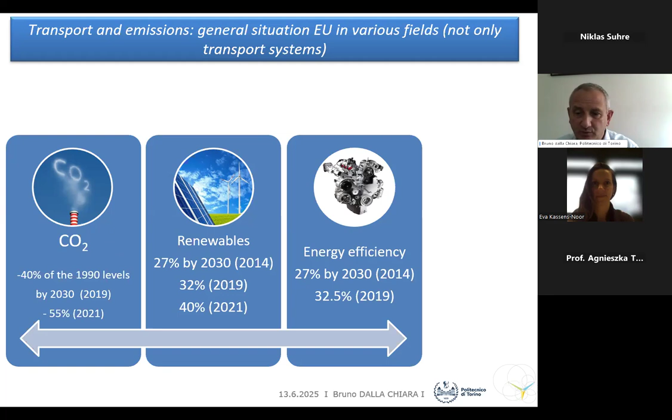First point is the European Union has stated already some years ago, but over the years has modified the vision. The first time was in 2014: a reduction in CO2, an increase in renewables, an increase in energy efficiency. And this doesn't concern only the transport domain and mobility, but every field. Within the transport domain and mobility, we can push in particular the reduction in CO2 through modal shift, railways, metros, people movers, ropeways, through technologies, powertrains, intelligent transport systems, and through applied maths, that means optimization.

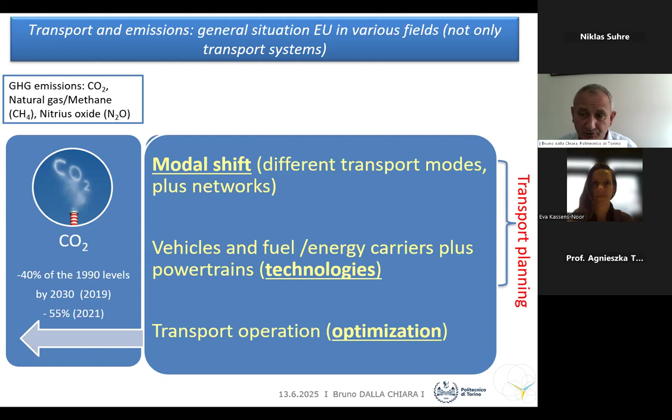I already told you this last time, but I'm resuming because I will use this concept today. And the first two in particular concern transport planning. I also remember that greenhouse gas emissions are not only given by CO2, but also by natural gas or methane and by nitrous oxide. If you release natural gas in the atmosphere, it contributes to greenhouse gas emissions much more than CO2. And then I will also remember this last one, then I will start with the new concepts.

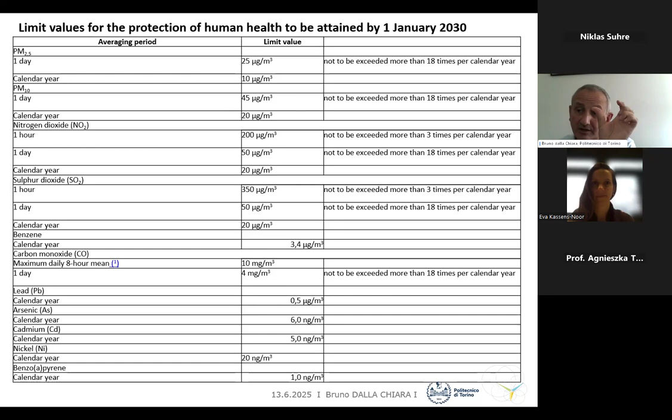That is, last year, 2024, the Directive 2881 was published by the European Parliament and the Council, and it concerns the level of concentration of pollutants mainly in our cities, where a great part of the mobility and population take place or live in Europe. So, resuming, we have this goal of reducing CO2, increasing efficiency, increasing renewables. We have also the goal to contain emission of CO2, which is a global problem. At European level, we have this goal of containing local emissions, and in particular looking at their concentration, especially in the cities. And this table is accompanying the Directive 2881 of last year, which will be in full operation from 2030, and which regards the concentration of pollutants, mainly, as I said before, in our cities.

If we consider that this is a source that cannot last for decades, or if it will be more expensive, or if we have to attack the North Pole or Greenland to obtain crude oil beside deep oceans, or if we consider that pollution coming from crude oil is relevant, one or more of these elements, then we have to look at alternatives.

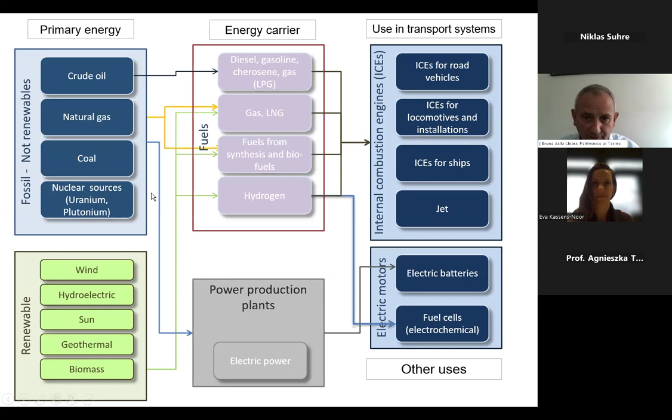So the first point is that once we decide to abandon the monopoly of crude oil, what we have to see is if the energy source that we have in mind is available in nature on its own, or if we have to prepare the fuel. In this kind of analysis, if we think, for example, of a battery, we need to analyze the well to wheel. This concept was already introduced last time. That means from the well to the tank and from the tank to the wheel.

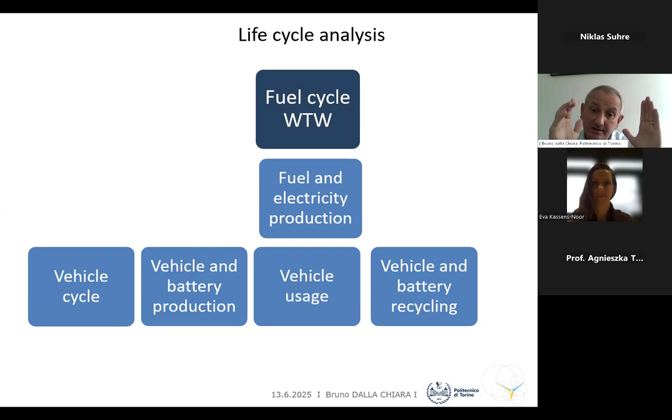But we don't only have to analyze the energy chain of the fuel or the energy carrier, but the life cycle of the vehicle. Because if we have to emit a lot of CO2 for building a motor vehicle, then the CO2 will be emitted in the life cycle, though not necessarily during the operation. For example, an electric vehicle could seem to avoid CO2 emissions at the tailpipe because it has no tailpipe, but in the life cycle approach, we have to consider that for creating that vehicle and that battery, the CO2 has been emitted before.

Okay, given this general premise, I recall that as regards CO2, in 2011 the European Union introduced for the first time the concept of containing the CO2 emissions of car makers within their fleet, passing from a threshold of 130 grams of CO2 per kilometer to 95 grams of CO2 per kilometer in 2020, actually 2021. Then in February 2023, the European Parliament said, well, let's bring this 95 grams of CO2 per kilometer to zero. And this has opened a wide discussion. We will see this later.

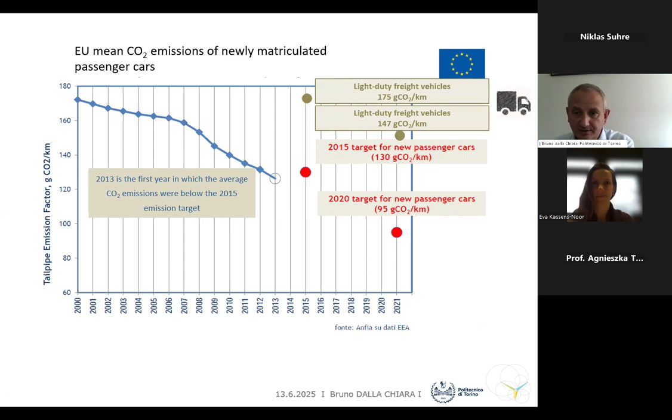As regards light duty freight vehicles, this threshold passed from 175 grams of CO2 per kilometer in 2015 to 147 grams of CO2 per kilometer in 2021, actually end of 2020. Okay, which are the regulations which started this evolution? These two: this is the legislative vision, regulation 510 of 2011 and regulation 397 of 2013. Sorry, some parts are in Italian, but you have the text in English too. This regards both motor vehicles and light commercial vehicles. It was the first time.

Before that date, there were just Euro 1, 2, 3, 4, 5, 6 as emission classes, but looking just at the local emissions. Okay? Local emissions, pollutants, and global emissions, CO2 in particular. In 2011 and 2013, the European Union started analyzing these values, with an environmental relevance that was becoming important in these years.

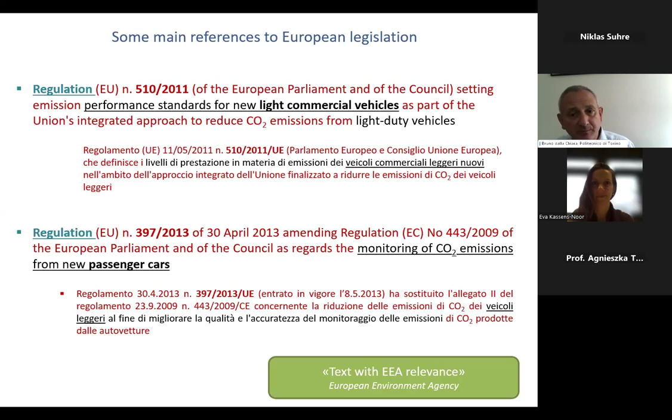Okay, skip this slide. As regards internal combustion engines, sorry, this slide is in Italian because I had prepared it that way, but I'll comment on it rapidly. In 1992, when there was a first feeling about the environmental impact, and so the concept of sustainability of transport systems, a sustainable mobility in terms of emissions, the first class of engine was introduced, and it was Euro 1.

Then in 1997 it became Euro 2, then in 2001 Euro 3, in 2006 Euro 4, in 2008 Euro 5. Then Euro 5 had two steps, Euro 5A and Euro 5B. Euro 5B introduced filters for particulate matter, greatly reducing the particulate matter produced by internal combustion engines. And then Euro 6, the current one, was introduced in September 2014 with different versions.

Euro 6B, 6C, D temp, and D. Then from the 1st of July this year, the Euro 7 will enter into force, Euro 7. It was prepared, it was, let's say, emitted for the first time in November 2023, but the application of it starts this year.

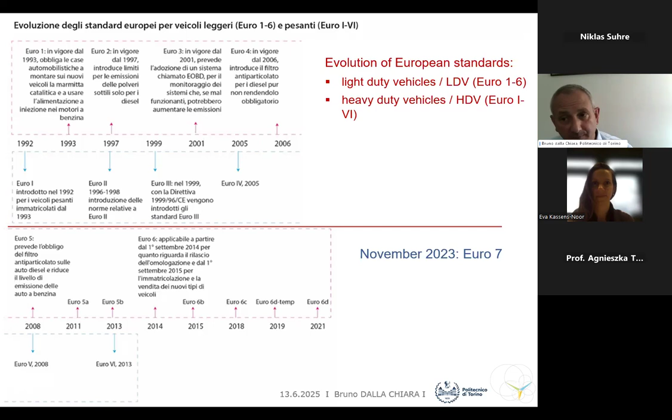Okay, so at a certain moment of the history of this classification, as I was saying before, in 2011, also CO2 was introduced as an important element to be considered, but not at each vehicle, but in the fleet of each car maker. We will see it later.

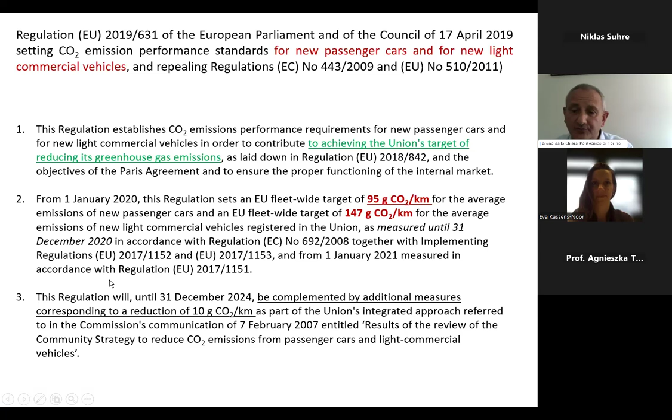Okay, then in 2019, the regulation 631 introduced a certain number of specifications confirming the value of 95 grams of CO2 per kilometer that was stated some years before, but also introducing some reduction in the emissions that the European Union wanted and still wants from the car makers in order to obtain in the next years a containment of, in particular, the CO2 generated by the fleet of each car maker.

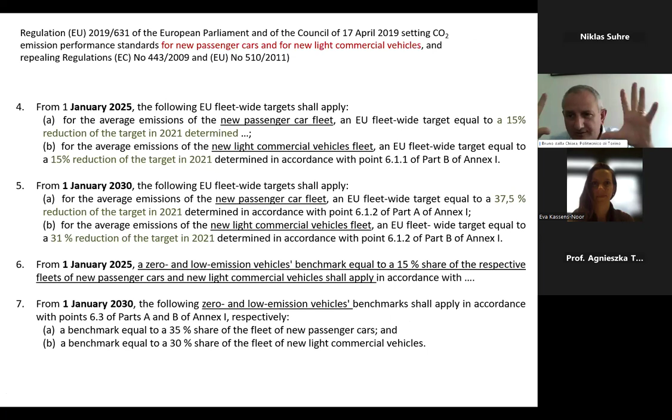I don't enter into the details. For me, it's important that you understand this evolution, and then we will see how we can pursue it. What about the effects of this? Well, if the car maker is able to reduce the average value of its fleet underneath the threshold, in this case 95 grams of CO2 per kilometer, then it will receive super credits. But nearly none, no car makers are able to do this.

Then if they have values that are higher, they have to pay a penalty. And this year, the car makers have asked to suspend the penalty because they are not able to satisfy all the very, let's say, important, relevant, but also difficult to apply goals that European Parliament has stated.

So we are in this moment at a great ideal of containing both local pollutants and global emissions of CO2, and a great difficulty of the car makers to apply them further than 95 grams of CO2 per kilometer. And we are at this point. This year, the European Parliament allowed them to spread the satisfaction of the limit of 95 grams of CO2 per kilometer, with the consequent penalties, over 3 years. But it's not a solution, it's just a way of, well, let's think about it.

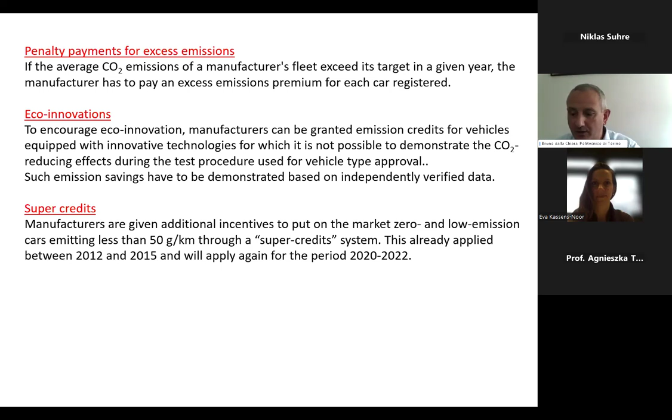Okay, then, as I said before, this Euro 7 classification of engines started 3 years ago, but with application from this year, and it was approved by the Parliament in April 2024. Consider that there are some difficulties, because a car maker cannot at the same time go towards zero emissions and Euro 7, because there is a time for using the plant installations, I mean, a certain number of years. It's not true that we can invest in a certain line and then after a few years change it, because you would have, let's say, some difficulties also from the economical point of view.

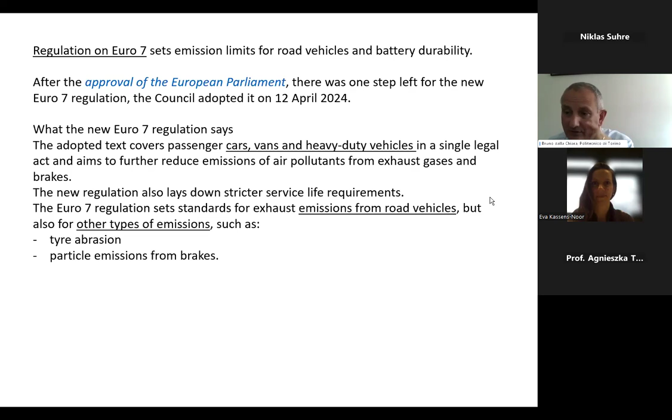Okay, what is the innovation of Euro 7? Well, it doesn't consider just the emissions from the internal combustion engine, but also from tires, tire abrasion, and from brakes. These are the three main sources: brakes, tires, and engines. So, of course, these concern any kind of vehicle, also the electric one, in particular the tire abrasion. Then, as regards buses and heavy trucks, I don't enter into detail about them because it is not part of this lesson today. But anyway, they have been introduced recently with some different, let's say, viewpoint concerning them.

In any way, what is now considered with Euro 7 is the introduction of the concept of life cycle. And this is important because, as we understood also from last time, it's not only important the local level emission from the tailpipe, but as I said before, the well-to-wheel and the life cycle of the vehicle itself. We need to recall that the white paper published already in 2011 stated that the challenge in Europe is to break the transport system dependence on oil, but without sacrificing its efficiency and without compromising mobility. So we have to think, when thinking about alternatives to oil-derived fuels, of engines, motors that neither sacrifice efficiency nor compromise mobility.

Is the European Union the only one that 2 years ago stated this zero emission goal? Yes, because other parts of the world, as you can see in this slide, United States, China, Korea, and so on, declared some reductions, important reductions, but none of them said ban, ICE ban, internal combustion engine ban. And this is under discussion now.

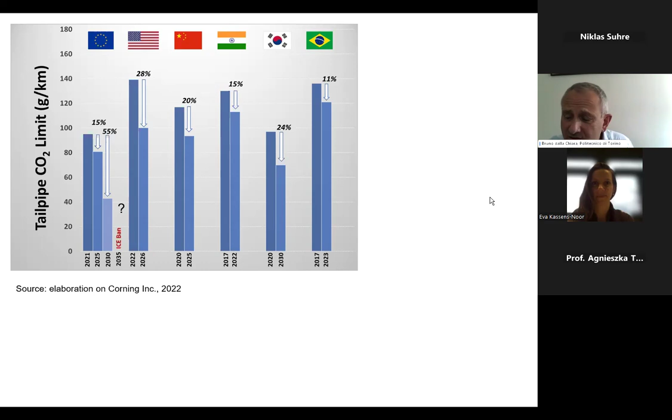It's an important matter because we know that the European Union relies a lot of its competitiveness on the production of motor vehicles, notwithstanding the fact that we are pursuing a hierarchical, differentiated, flexible, multimodal approach to mobility, because we can use the train from city to city, we can use the car, we can use the bike, we can use different modes. Notwithstanding that, we have an industry, so we have to take care about the effects of, let's say, making this industry close in case it cannot pursue the goals that have been stated.

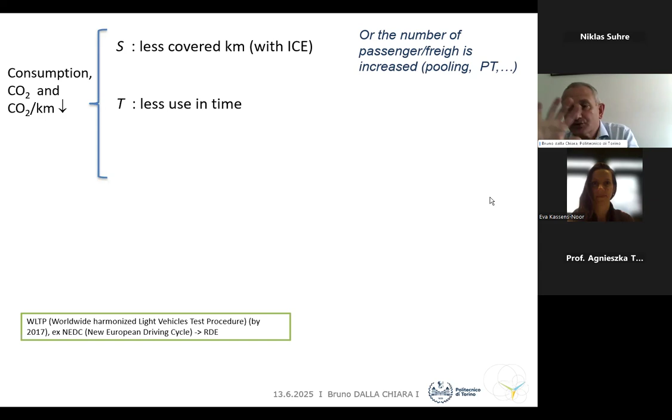How can we contain CO2? Okay, we can reduce the kilometers, of course, with an internal combustion engine. We can use the internal combustion engine for less time, and for example, a hybrid powertrain can do that because we can split the electric part of the traction from that obtained with an internal combustion engine, and we can operate on the efficiency. To operate on the efficiency means that we can operate on aerodynamics, on speed and acceleration, deceleration phases, on the specific rolling resistance of the vehicle, and on the mass and the dimension of the vehicles.

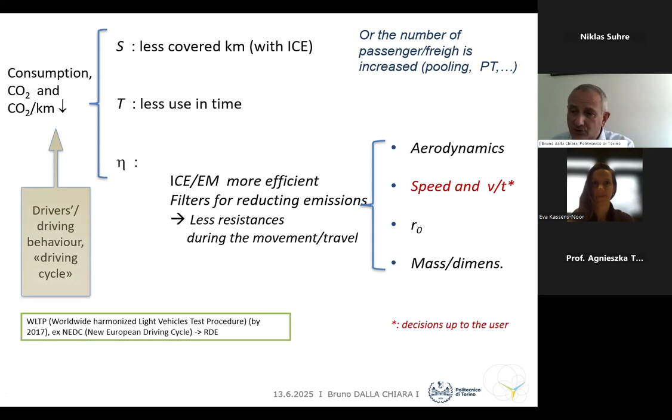Besides that, we can also operate on the driving behavior, considering that typically these CO2 emissions come from an element that I introduced last time, that is the conventional driving cycle. I don't know how many of you are familiar with that. There is a conventional driving cycle that is called WLTP, Worldwide Harmonized Light Vehicles Test Procedure, which when applied implies a certain number of emissions at local level and at global level. It was the one which arrived in the newspapers with the Dieselgate. So the fact of influencing through the software the emissions in order to contain them and not pay taxes according to these emissions.

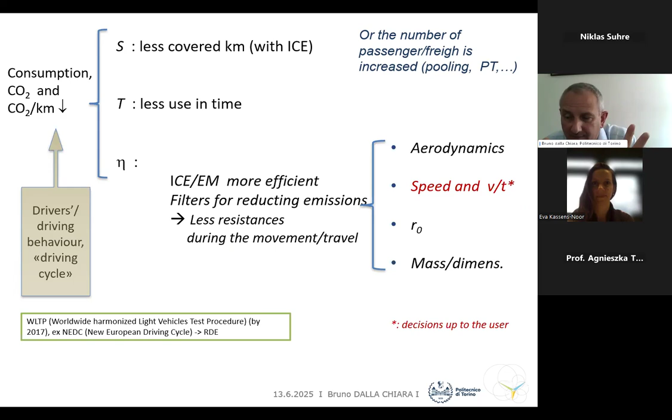So having, I hope, the picture clear, where the CO2 comes from and how we can influence that, let's see how we can modify the powertrains and which are the alternatives. The picture that I introduced a bit last time, now I will recall it and enter into more detail. The first level is a micro-mild hybrid. That means we just have a belt-driven starter generator. We don't have an independent electric traction, but we can reduce the emissions because the internal combustion engine is assisted to some extent, and you have a battery which can do some activity. And also you can recover part of the energy during the braking phase.

Then you have a real hybrid solution, which can be either parallel or serial hybrid. We deal with transport systems, so we don't have to be experts in engines, but at least I let you understand which are the main elements. In the parallel hybrid that we will see shortly, we have the alternative of internal combustion engine and electric traction, but they can collaborate. The electric motor can collaborate with the internal combustion engine and assist it during the acceleration phases, so reducing its power. And also it can collaborate with the internal combustion engine in the braking phases, because instead of transforming the power into heat in the brakes when you need to brake, you can reverse the electric motor in order to recover energy that can be provided to the battery. So you see a collaboration, and you can also use one of the two, engine or motor.

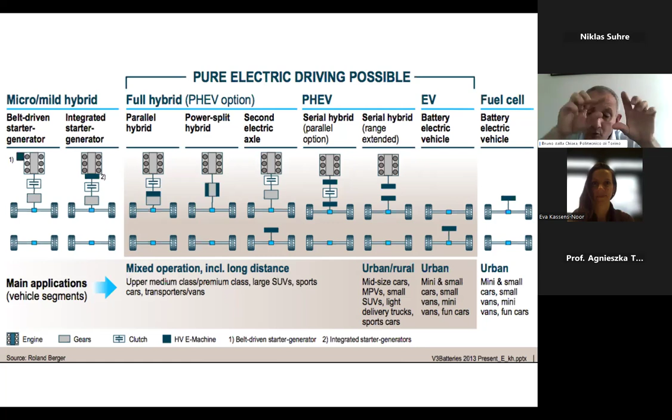In serial hybrid, instead, you have the electric motor and internal combustion engine in series. This comes mainly from electrical engineers who say, well, let's put the internal combustion engine with its tank, but instead of connecting it directly to the wheels, we use it to provide energy to the battery and to the electric motor so that the internal combustion engine works at its optimal conditions. And so we can contain emissions and make it more efficient.

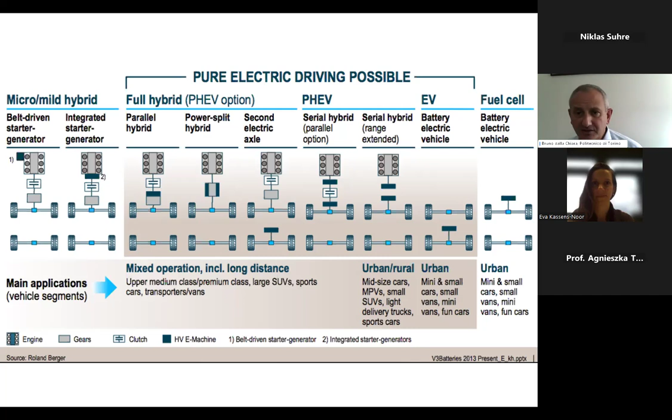Then on the right side, we have the extreme solution, that is all electric. I avoid using the internal combustion engine. I put a battery, I put an electric motor, and the vehicle goes like that. Or a fuel cell. The energy is stored in a fuel cell, typically of hydrogen, and then you have an electric motor which uses the energy stored there to move the vehicle. Okay, I hope it's clear. Let's see in a bit more detail how these work.

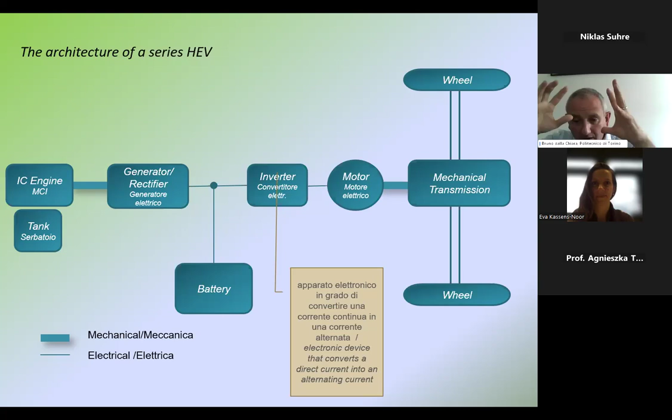This is the architecture of a series hybrid electric vehicle. So as I said before, this was born in electrical engineering. You have an internal combustion engine which works typically around the top of its conditions. So in the map, it's working well. And through a rectifier it provides electricity. Before it's just a movement, then it becomes electricity for the battery, and through the inverter to the electric motor, which is what moves the wheels.

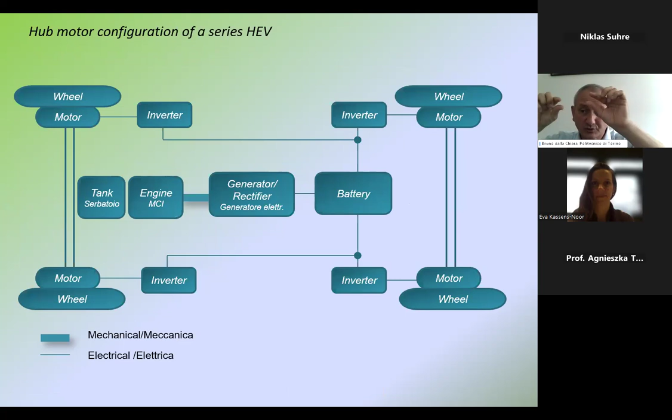Okay, this is in series. The main alternative to this is, well, this is again a series, but you have the electric motors in the wheels. So the concept is similar, it's the same architecture.

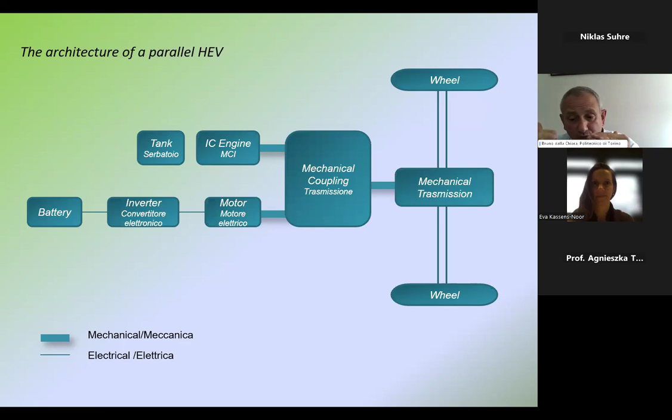Then the alternative is the parallel hybrid electric vehicle. In parallel, you have the internal combustion engine and the electric motor. The electric motor assists the internal combustion engine, and during the braking phases it recovers energy to put it into the battery. And again, this is positive because you have a downsizing of the power of the internal combustion engine, and you recover part of the energy. This allows to reduce emissions at both local and global level.

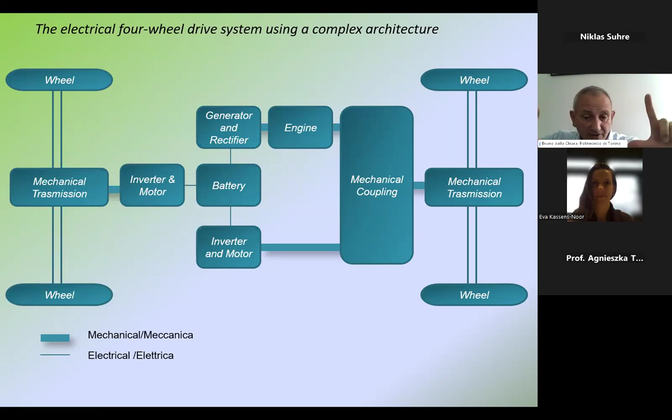And last but not least, the most flexible architecture, that is the plug-in hybrid. The plug-in hybrid allows you to recharge the battery either by using the internal combustion engine or by connecting through a charger to the electric grid. So you can use the internal combustion engine or the electric motor or both of them, and you can recharge the battery using the engine or by connecting the vehicle to the grid. This is the most flexible, but given that, it's also the most expensive.

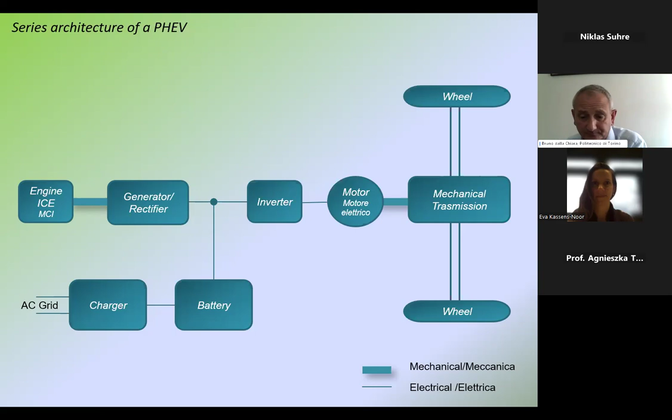It's like having two vehicles in one, but it allows you to move, for example, with electric traction in a city and with the internal combustion engine outside the city. And since outside the city you can use the most efficient parts of the engine map, you gain in terms of emissions at both local and global level: no emissions in the city and low emissions outside the city.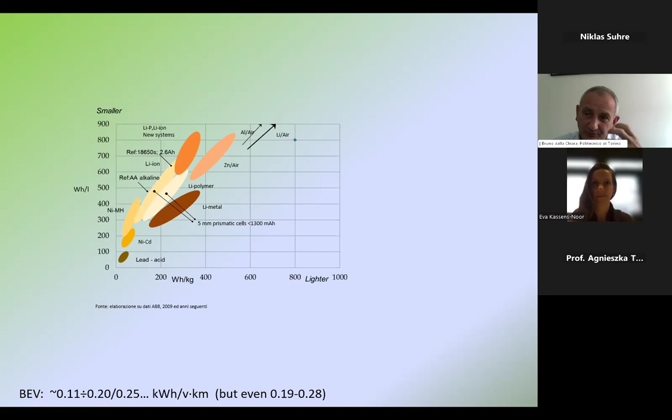I don't know how sensible you are to energy densities, but compare these values with oil-derived fuels like gasoline and diesel. Crude oil has an energy density of 42 megajoule per kilogram, which transformed makes 11.67 kilowatt hours per kilogram, that means 11,670 watt hours. You have to compare these 11,670 watt hours with 200. So the energy density of the best batteries is at least 60, even 90 times less than that of oil-derived fuels.

This means that to have the same autonomy you have with a tank and an internal combustion engine, you need a much, much bigger battery. But you recover part of this ratio because the electric motor is much more efficient than the internal combustion engine. Typically, an internal combustion engine at the top of its efficiency nowadays arrives at 48% by itself. Then if you apply it on a car, you lose part of that because of the transmission, and you arrive at 38, 39 percent. That means you insert 100 and you have 38 at the wheels.

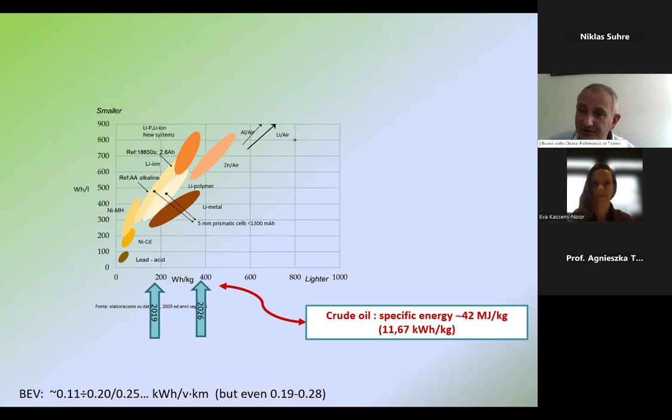And then inside the car, you use the heat from the engine to provide air conditioning of the vehicle, then of the passengers. This cannot happen with the electric motor because you have to produce that heat somehow. So this means that those consumptions, kilowatt hours per vehicle per kilometer, are in normal conditions, but the energy management of the battery, the self-conditioning of the battery and the conditioning of the inside of the vehicle imply even a 50-60% increase of consumption. Okay.

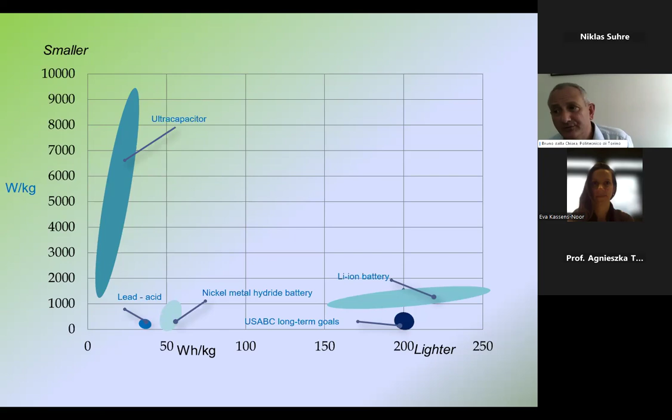Given that, we have some possibilities for the batteries like ultracapacitors, lithium-ion batteries, as you can see here, which imply lighter and smaller batteries. But for the time being, a revolution is not foreseen. And consider that chemistry has been working on batteries for around 30, 40 years. So far, a revolution is not envisaged. We have to deal with an electrochemical process, to be compared with refueling a liquid fuel as we are accustomed to. Okay, and so this is more or less the picture concerning batteries.

But to complete the scene, to understand which can be the most promising alternatives, we need to know which is the use. So the point of view of the demand, that so far seems to be a bit neglected. So I start quoting a couple of sources in literature. This regards a comparison of daily distance covered by automobiles. Looking at all literature in the world, we found that from 25 to 37, in the United States even 46 or 52 kilometers per day is the typical average value for each automobile.

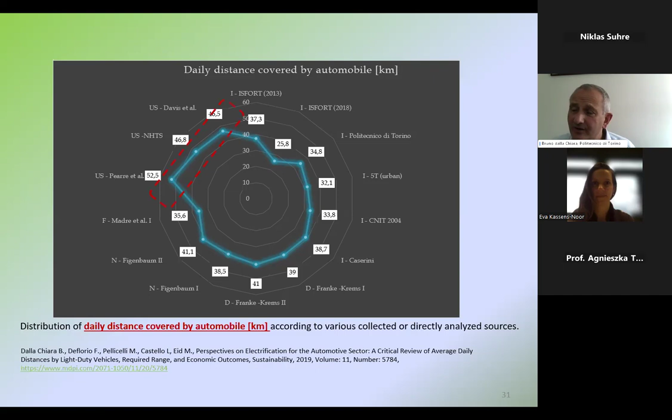In Europe, we drive a bit less. In the United States, they drive a bit more, but more or less these values are all the same order of magnitude. Okay, given that, it's not enough, because it's not enough to have an average value. We need to know the distribution. So where are these vehicles used? In motorways, in urban context, in extra urban context, and how frequently they are used there. Here I quote another source where you can find, according to big data concerning actual use of automobiles, how these vehicles are typically used.

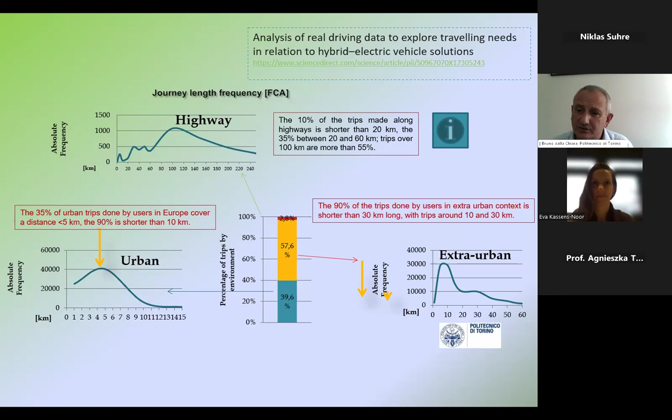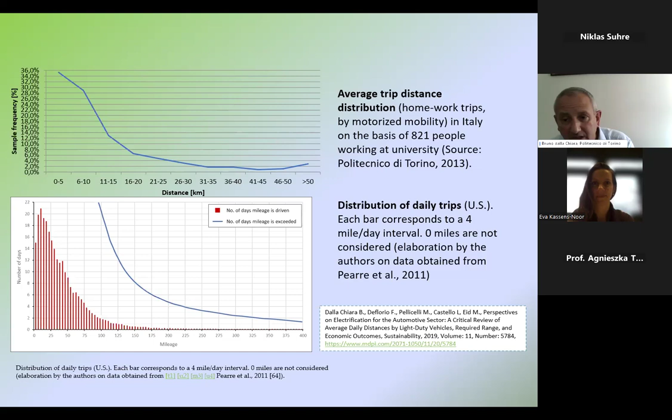And what we can typically find in literature around the world is a hyperbola where you have frequent short travels, typically in urban contexts, where 3 people out of 4, as we have seen last time, live in cities. So they express their daily mobility for short distances and very frequently, 4, 5, 6 days per week. And longer travels are typically associated to the weekend or to more or less occasional travels for work. Anyway, this hyperbola says we have frequent and short range, typically daily mobility, and less frequent motorized mobility with longer range. And what about idle times? That means how long these vehicles are kept in a parking area.

This is the slide which shows that. So typically we have short times when we are at the traffic lights, with the red light, of course, and when we stop for a while for shopping, or there are longer times where we are, for example, sleeping in the night and the vehicle is parked. But this is useful too, because we have to understand if, moving towards electrification, we have the time to recover the power that we've used in a typical usage that we have seen before.

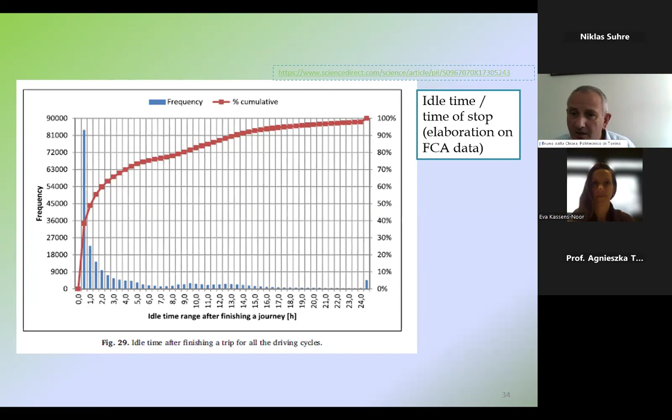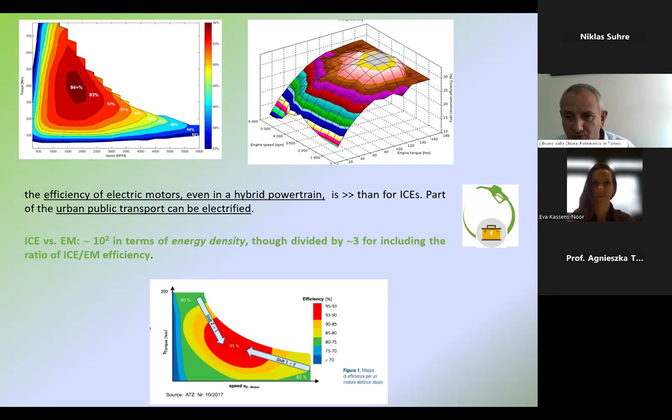On the right side, you find instead the map of an internal combustion engine that arrives, as I said before, to 47% nowadays, a bit less in older engines. And what we can do is, as I said before, to let them collaborate together. You can see that the engine evolution in terms of efficiency, the goal of the European Union, and particulate in terms of local emissions, is interesting because passing from Euro 1 to Euro 7, we have continuously decreased the particulate mass limits and consequently the local emissions, but also the global ones in terms of CO2 that I mentioned before.

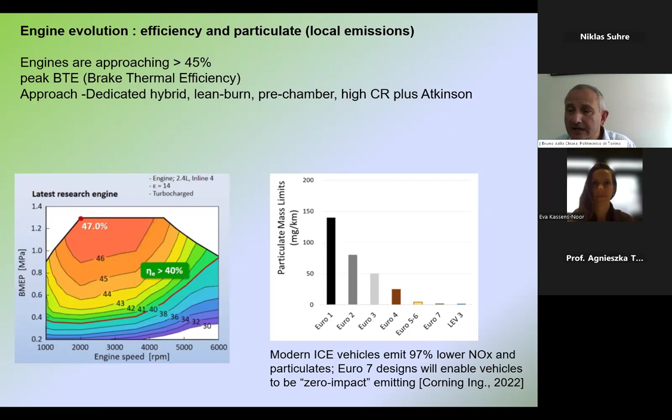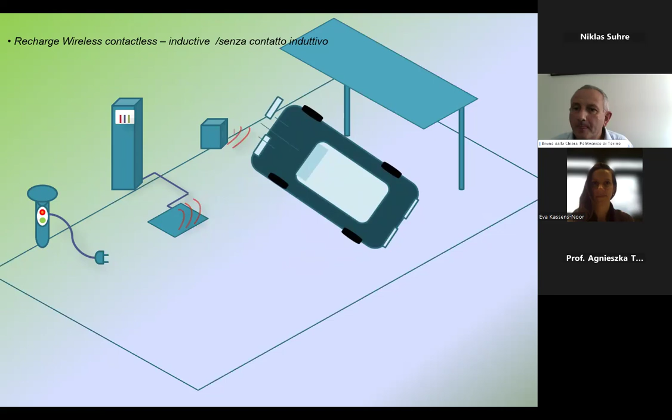How can we recharge them this way? So, provided that we understand that each of the solutions has its pros and cons, if we address the possibility to recharge the vehicle on the grid, we can either recharge with a wire or wireless, or with a contact. Here it is, or with the battery swap. The battery swap means to replace entirely the battery. Consider that this density, if you want to guarantee a certain autonomy, means a certain amount of mass. So it's not typically compliant with the strength of a person. It can be if you're dealing with a motorbike, a rickshaw, or something like that. Otherwise, you need an instrument.

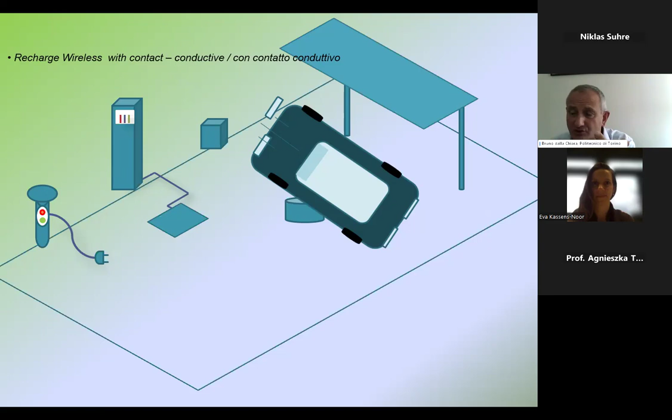Some companies have already promoted in the last decade a solution based on substitution, so battery swap. But you need to be there and you need to standardize the battery. But especially you need to be there where you have to change it. And this is the most complex thing, typically when you're moving anywhere. Maybe in the cities or maybe at home. You have two batteries, you arrive at home, you change it. But it's your own battery and you do it at home.

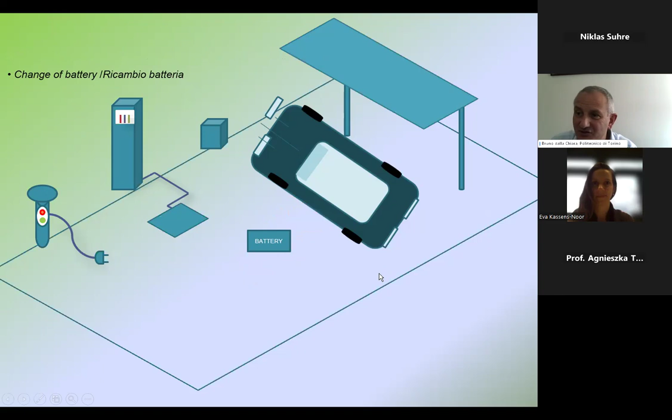So given that, as transport systems engineers, professors, researchers, whatever we are, we have to check this number of possibilities in order to address a solution that is compliant with what we said before, that is efficiency and not compromising mobility. Some solutions also proposed some mobile vehicles that can arrive where the vehicle needs, but again, you need to reach them. Maybe if you are in a traffic flow and you cannot reach the vehicle, how can you solve the situation? I don't know.

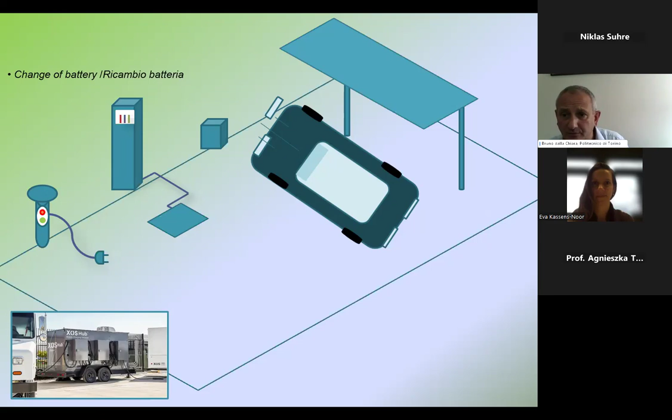Then another issue, if we move towards full electrification, is to analyze the queues. Because if you have a one-to-one possibility, then it's fine. If you don't have a one-to-one possibility, and typically it regards people who don't have the possibility to recharge either at home or at a working place, then applying queue theory, I don't know if you are expert in queue theory, but provided the number of services and the distribution and the number and distribution of the demand, you can quantify the length of the queue in terms of meters, kilometers, and the time in the queue.

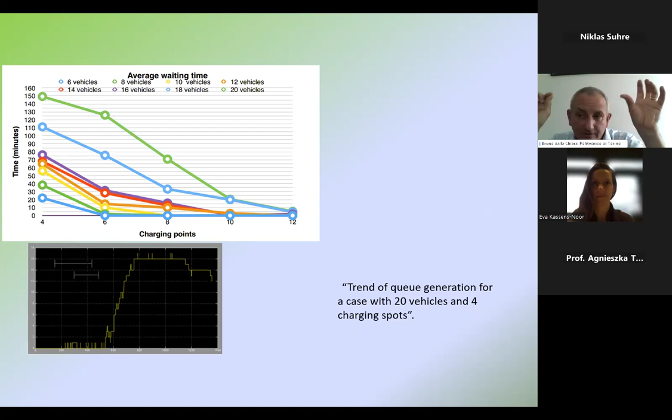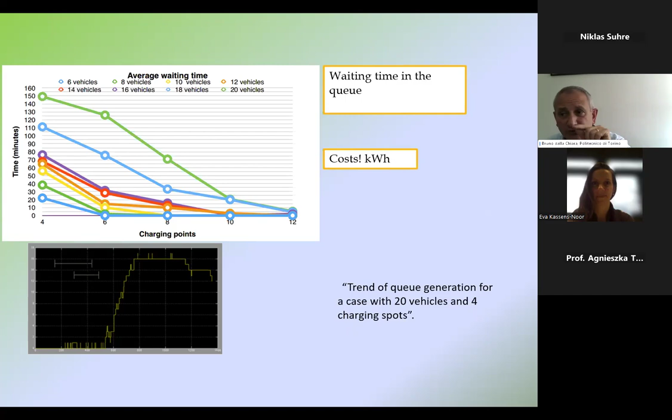So given that, if we imagine the scalability of electric vehicles, we have also to calculate the effects on the queues. So maybe, again, a compromise or an integration of solutions could be the best thing. Of course, we can reduce the queue and the waiting time if we increase the power. But this means, again, an increase of cost, because while a normal recharging costs like 20, 30 cents of euro per kilowatt hour, depending where we are in Europe, if we address fast and rapid charging, we arrive to 40, 50, even 90 and more cents of euros per kilowatt hour. So it means that we pay more for recharging than for refueling.

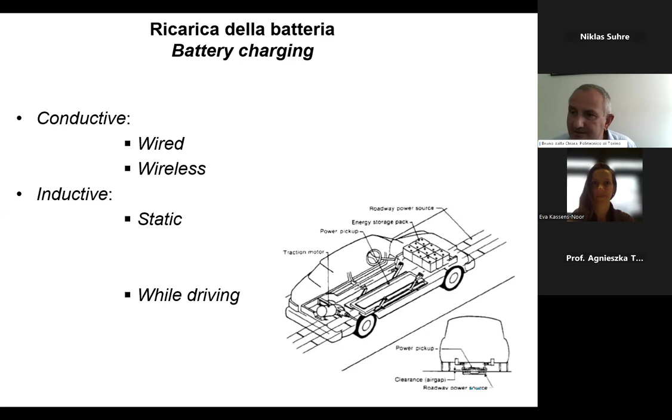So how can we charge this battery, as I was saying, with a wire, but also wireless, with inductive charging, in a static way or while driving? So those who push towards a full electric market say, well, we can equip the lanes of streets, of motorways, with the possibility of making inductive charging. That means charge while driving. This is a cost of infrastructure not so marginal, and according to some proponents, this could be the solution. But consider also that you should do it in many places on the infrastructure.

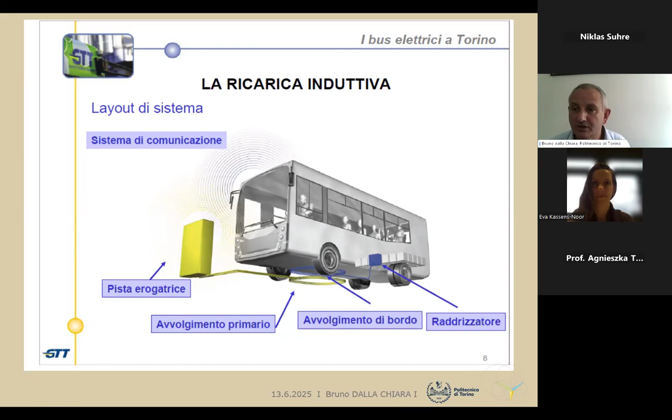This is an example, sorry, it's in Italian, of a bus already existing since 2003 in Turin, the city where I live, working with inductive charging. When the vehicle arrives at the terminal, you have the change of the driver, and during those 5-10 minutes, the battery is recharged with inductive charging so that you can have the autonomy for the next service. And this possibility is a static wireless charging. But of course, it's more suitable for a fixed path circuit, so typically for public transport, when you know more or less where the vehicle has to go and when it has to stop.

In this kind of charging, the inductive charging, consider that the air gap has an influence on efficiency. If you have a big air gap, you even lose 50% of the power you provide. So if we think again at the well-to-wheel, we have to provide the electricity. It depends where it comes from, because if it comes from coal, it's not winning at all. If it comes from natural gas, we have a certain efficiency in the production of electricity. You lose something like 6-7% in distributing electricity. In recharging, you lose some percent. In aging of the battery, you lose 10-15% after 2, 3, 4 years. And in inductive wireless charging, with an air gap like this, you could have a loss of power.

And then you have the efficiency of the engine itself. So apparently, it's very good to have an electric motor, but we have to consider the energy chain: the recharging of the battery and the well-to-wheel, without losing sight of the life cycle analysis.

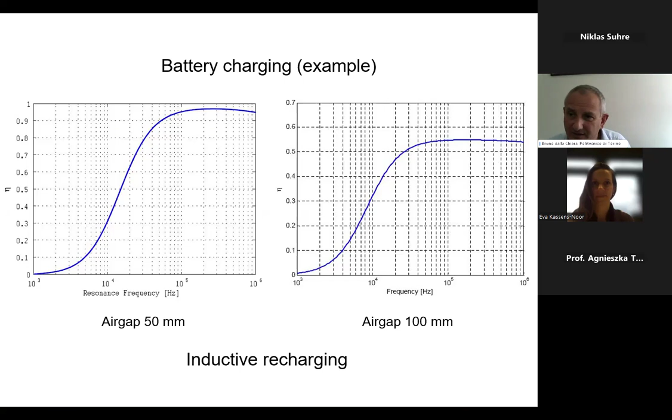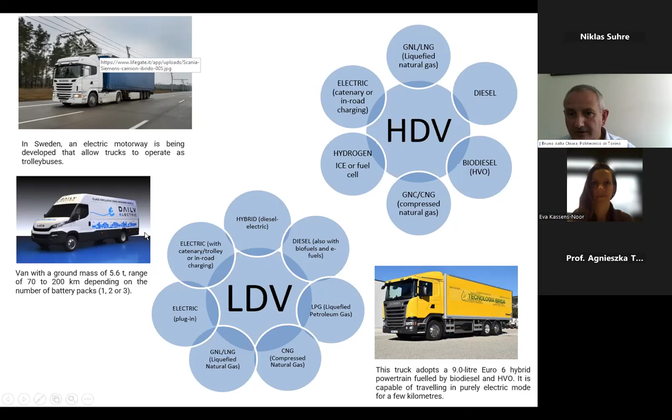Then, last but not least, electric. But of course, for high masses, it's not convenient because the density of the battery implies an increase of mass, so it's better in that case to reduce the size of the battery and have a catenary or in-road charging. So these are the alternatives that nowadays we have in front. Given that, what can be winning? I already introduced this concept last time.

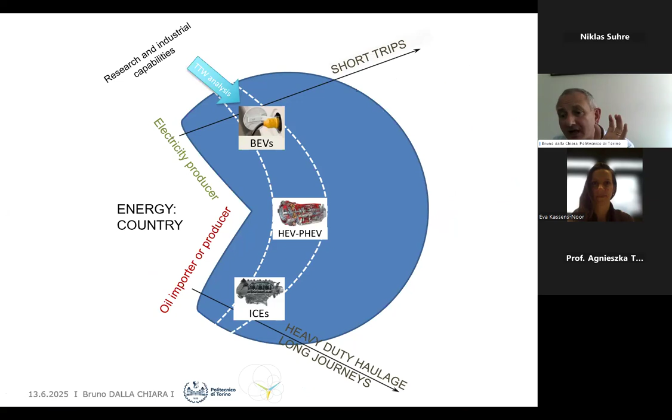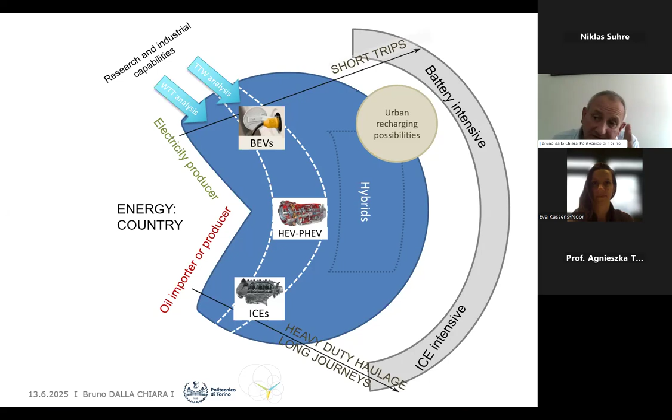If we have to deal with short travels, typically we will address mainly battery electric vehicles. Long travels, high masses, it's better to have internal combustion engines, with the intermediate solutions of hybrid electric powertrains, even plug-in. Then, if we address short trips in city context, it's better to have recharging possibilities, otherwise we will have a lot of queues, and hybrid solutions for the various situations. A more battery intensive or internal combustion engine intensive market according to the elements that I said.

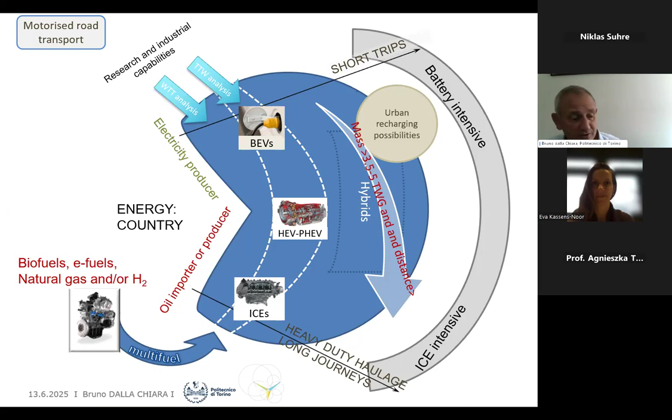Then as regards the internal combustion engine itself, according to what I said, you can use biofuel, e-fuel, natural gas, or bi-fuel or dual fuel engines. For example, you can use biogas and diesel. There exist engines which are suitable for both of them. Or you can use hydromethane, natural gas and hydrogen. These are solutions that we can envisage nowadays for the near future. The higher the mass, the higher the distance, most probably the higher the probability that you will use an internal combustion engine.

So concluding, the internal combustion engine has pros: the energy density, the time and easy fueling, so it requires less time, you just pour the liquid, and the existence of a network. These are the main elements, not the only ones. The electric motor has a motor efficiency, and a recharging time which doesn't allow it to be so winning with respect to the internal combustion engine. But if we look at local pollution, this moves towards electric.

So the best solution in my point of view, but this is an opinion, is, as I said before, to let these alternatives collaborate, not to be one against the other, because each of them will lose. And if they collaborate, they will be winning, provided that we are not looking anymore to a full mobility made of motor cars, but hierarchical, flexible, multimodal, but the car has a role. And the industry in Europe has an important role. So we have to provide a solution that is compliant with the demand and with the constraints that we have seen so far. That's all.